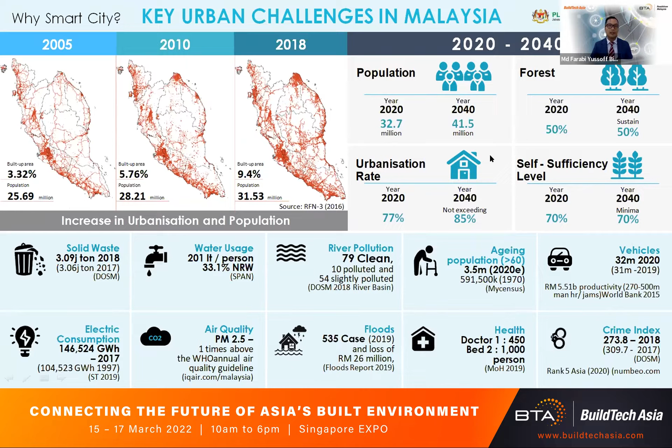Having said that, the Ministry of Housing and Local Government has launched a program called Livable Malaysia to make sure urban dwellers will be able to live in a better environment. Our minister is eager to lead this initiative, led by the Ministry of Housing and Local Government.

The ministry has taken proactive measures by introducing the Smart City Framework back in 2019. It is a national level framework that serves as a guide and reference to local authorities as city managers, state governments, federal ministries and departments, industry players, academicians, and other stakeholders in planning and developing smart cities in Malaysia holistically and in line with current development. We have this framework as what we call a textbook for smart city in Malaysia.

So what is smart city? Probably we have various backgrounds here, so I should share the definition of a smart city: a city that uses ICT and technological advancement to address urban issues, including improving quality of life, promoting economic growth, developing sustainability and a safe environment, and encouraging efficient urban management practices. This is basically the definition that has been accepted in Malaysia.

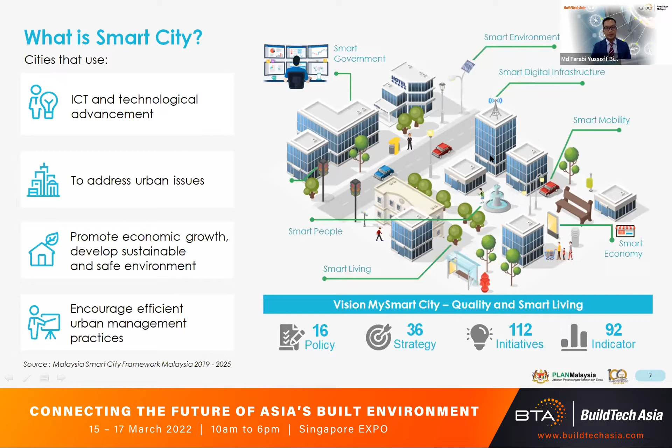Smart city is a very broad area and focus area. The comprehensive smart city development process encompasses 4 unified components: consumer, services, data, and digital infrastructure. Smart city is a unique approach in managing cities. What we see around us is horizontal development, however smart city works vertically as well. From the top level with the people-centric concept, the people will decide what kind of services and facilities are needed in the smart city.

This will then generate the second level tier, which is the kind of services that have been provided. We have a lot of services being offered here in terms of transportation, electricity, water supply, telecommunication, and a lot of other services as well.

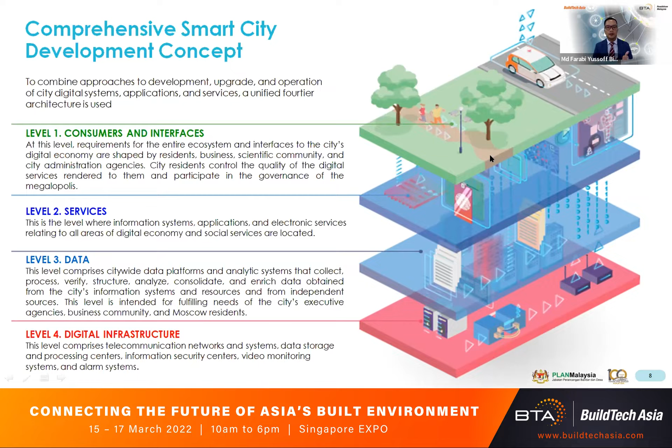The third level is the data being generated from the smart city initiative. For me as an urban planner, the key point of smart city is actually the data - data is wealth, and this data is something that we need to manage. The last level is digital infrastructure - smart city couldn't function at the optimum level without good digital infrastructure, which ensures the whole system works.

So big data. This is my favorite topic. Big data is often discussed in the context of international development and improving the urban environment. But what exactly is big data? How can it be used?

It is a fundamental component of the smart city. Big data plays an important role in a smart city. Cities can process data from IoT services, devices and sensors to recognize patterns and needs. Smart cities use IoT devices such as connected sensors, lights, and metering to collect and analyze data. The cities then use this data to improve infrastructure, public utilities and services, and many more.

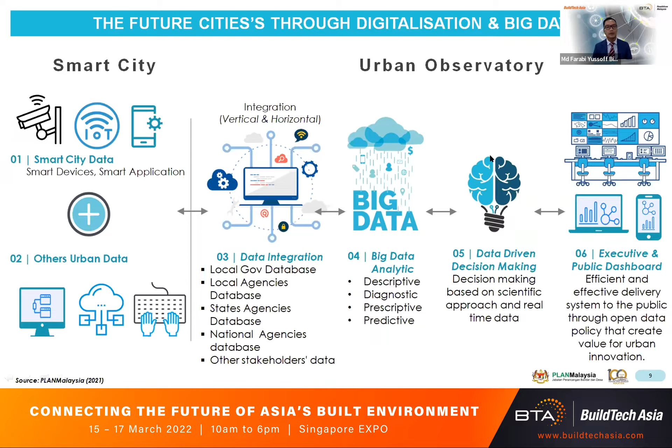Having said that, the biggest question mark is how we measure the smartness of a city. At the global level, ISO, International Standard Organization, have published more than 22,000 international standards and related documents that represent globally recognized guidelines and frameworks based on international collaboration. Built around consensus, this provides a solid base on which innovation can thrive and is an essential tool to help government, industry and consumers contribute to the achievement of every SDG.

As part of the implementation strategy under the Malaysian Smart City Framework, the Ministry of Housing and Local Government through Plan Malaysia have introduced the Malaysian Standard on Smart City Indicators to measure the smartness of the city and to establish a standard that recognizes a smart city status which is globally accepted and recognized.

Plan Malaysia, my agency, is working together with the national standard body, the Department of Standard Malaysia, and other stakeholders to develop the Malaysian standard on smart indicators, now known as MS ISO 37122:2019, via identical adoption of ISO 37122. We just launched this in December last year.

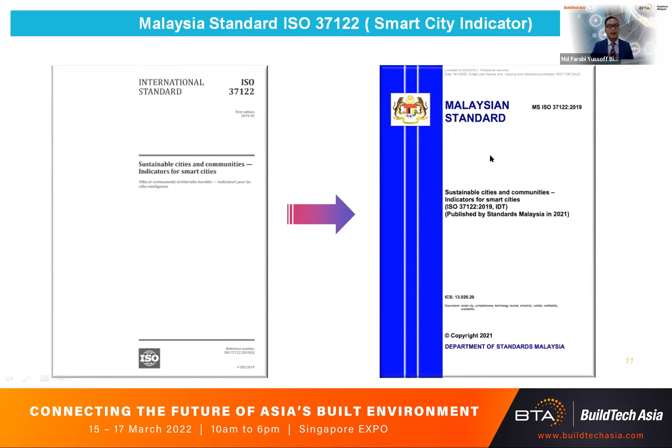These are the simplified indicators based on the city indicators in ISO 37122. There are 80 indicators to measure the smartness of the city globally and also in Malaysia, under 19 city indicator categories.

This is how we simplify things, in a more reasonable diagram. These indicators under this standard also highlight the future built environment. For example, buildings equipped with smart water meters and smart energy meters, road networks equipped with real-time online traffic alerts and information, and the provision of smart garbage bins equipped with sensors, and a few others. These are some of the smart initiatives that could be introduced in any developments in the future.

The future built environment should be equipped with smart building elements. This is one example I took from smart buildings under smart environment, that use technology to enable efficient and economical use of resources while creating a safe and comfortable environment for occupants. Smart buildings may use a wide range of existing technologies and are designed or retrofitted in a way that allows for integration of future technological development.

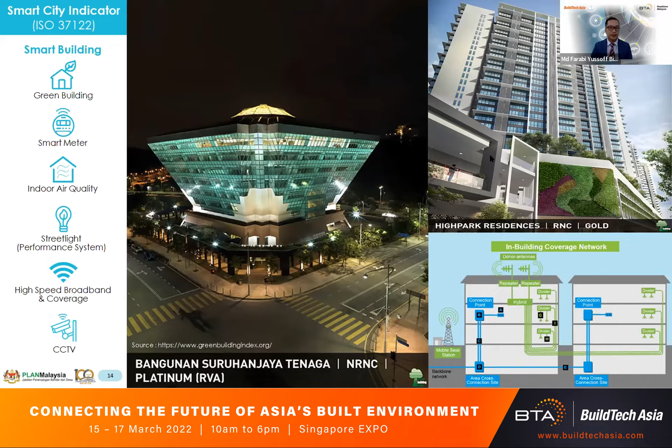So these are some examples. The basic idea behind green building is to carve out techniques and skills to bring down the effect on the environment and human health to a lesser degree, by promoting the optimal use of renewable energy.

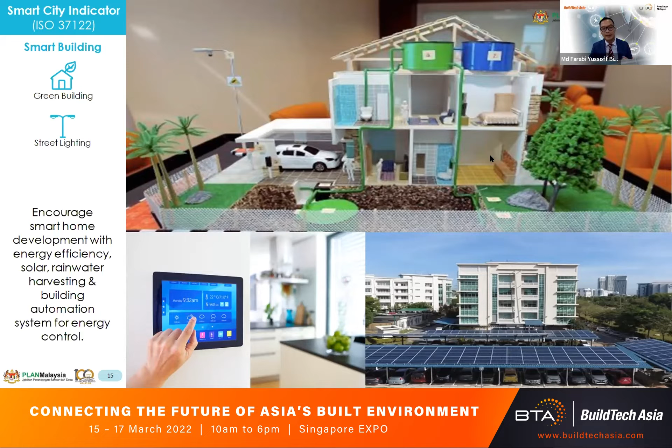Using sunlight through passive solar, active solar, and photovoltaic equipment, and using plants and trees through green roof, rain garden, open space, and reduction of rainwater wastage. This is very in line with our standard ISO 37122, which emphasizes two elements: smart green building, the need to have a green building and to refurbish old buildings which are unsustainable, and smart street lighting to refurbish old lighting to smarter ones.

Next, smart transportation. This is another issue a lot of cities are facing. Smart transportation and smart city traffic management are

revolutionizing how cities approach mobility and emergency response while reducing congestion on city streets with sensors, advanced communication technology, automation, and high-speed networks. So the smart city indicator standard highlights real-time online traffic alerts and information, public transport lines with publicly accessible real-time systems, public transport with unified payment systems, public parking space with e-payment systems, parking space with real-time availability systems, autonomous vehicles, electric vehicles, charging stations, and so on. This is a kind of technology that we can use to improve mobility in the city as well.

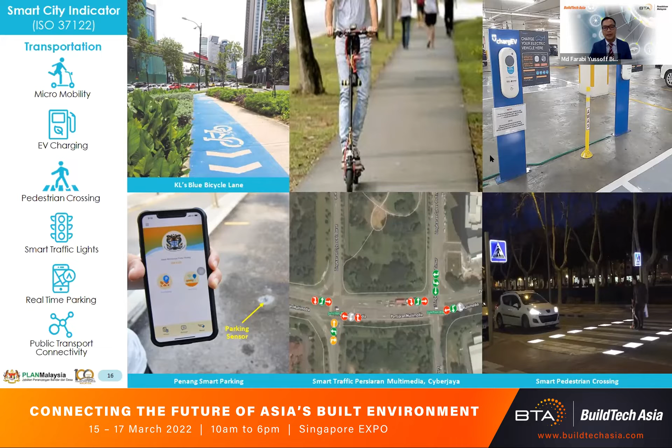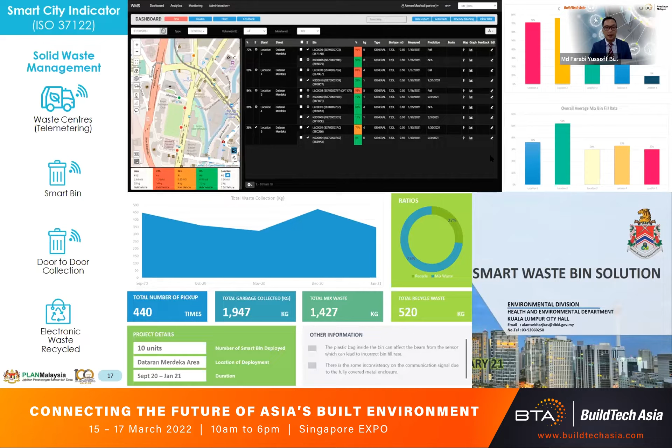Okay, I think this is probably the last one. With the adoption of ISO 37122, we see that it is just the beginning of the journey in a smart city. So we see that ISO 37122 can be used in three different perspectives.

Knowing that our crowd today comes more from construction services, I would like to encourage you to please use this standard from the strategic viewpoint, as a tool for smart city project planning at the local level, and set priorities based on the local context. In developing any new development, you can use the 80 indicators as guidance, and choose whatever is suitable to the local context and uniqueness of the city.

So for us at the governance level, we use this standard in terms of monitoring aspects. These indicators can be used to assess the maturity of smart city implementation throughout the cities in Malaysia. We have more than 200 cities in Malaysia, and about 155 local governments that govern the cities for now, and we can use this standard as well to measure the maturity index of a smart city and its implementation.

And the last one, we can use this standard as a recognition tool. So the standard will be used for evaluation and recognition to measure the smartness of the city.

As a conclusion, the development of smart city standards is very important to provide a guide for strategic planning to all related agencies in Malaysia, especially to deploy advanced technology-based solutions to help combat the worst case impact due to the COVID-19 pandemic or even climate change, by monitoring the health, safety, and living standards of citizens.

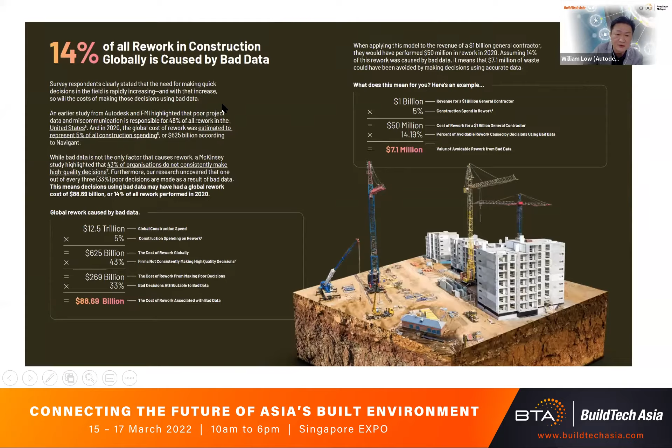Diving further into it, this bad data consists of two parts: missing data and duplicate data. In APAC, we contribute about 20% on average in terms of missing data and duplicate data. But what can we do to prevent this from happening?

We also found that 35% of time is really wasted on non-optimal activities. People spend too much time on paperwork, printing and writing on papers, and it's not able to replicate successfully. Even with BIM technology, there's still 280 billion dollars of rework, caused again by bad data.

We also found that 95% of the coordinated drawings already done in the office are not reaching site. That becomes a big issue, and that cost has resulted in 280 billion dollars of rework worldwide.

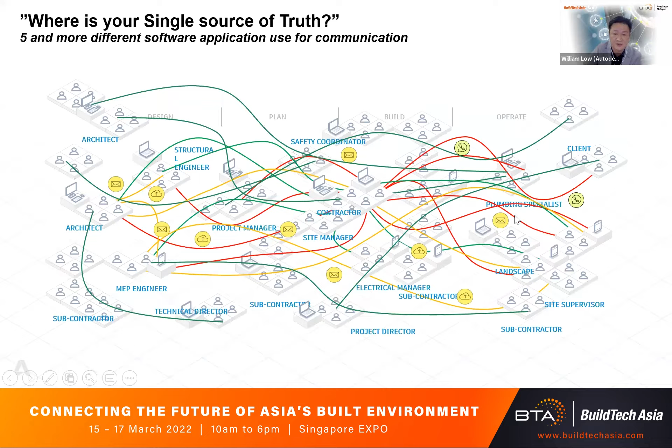And it's very obvious, right? You can see that everybody is using more than 5 software programs in one single project. Why? Because there's no single source of truth. If you drill further down into details, everyone takes their own part, using Dropbox, Gmail. These are good, but when it comes to an actual project, it's very difficult to trace back which version is the right version.

And it leads me to ask: where is the data? Who has it? How do office and field communicate more effectively, especially during this pandemic, when different people working from different offices come together for one new project? This is one of the issues we see: coordinated data is not reaching site, and people are relying on the wrong information to construct.

And you have to store all this paper that's going to be archived. Even after the project ends, all these things are causing a lot of social and environmental responsibility issues for the earth.

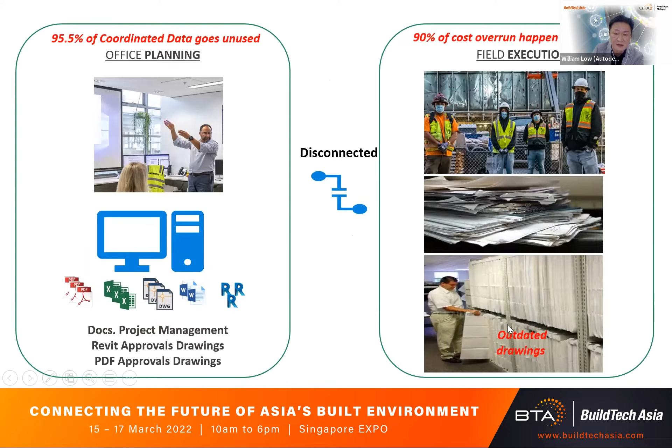I decided to use one particular case study. Recently we actually published this, feel free to take down the QR code, it will lead you to the construction blog.

It shows how we helped a particular main contractor, who had always faced issues, improve the way they work. At the end of the day, there was a huge return on investment: 30% savings in logistic management, and 40% improvement in the QA/QC process.

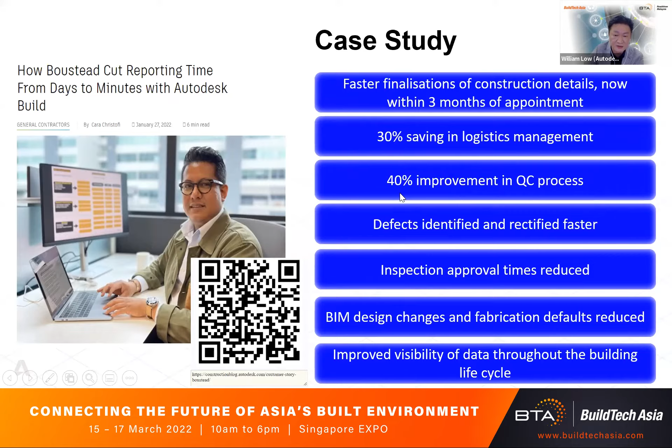Let me jump into the right slides for you. But before I go there, a quote given by this BIM manager, who is one of my very good friends: digital transformation is not about adding a set of digital tools or applications to work processes, but rather changing what we have been doing for the past 10 to 20 years.

It's true that there are better ways to work, and today I'm going to explore with you what are the better ways. Before we get there, let's look at the challenges as usual.

Approved data is not reaching site. Information gets lost through manual tracking, which is very tedious. There's no single source of truth, which is the reason why we're encouraging ISO 19650. And we're talking about capturing paperwork on site, which isn't replicable across all projects.

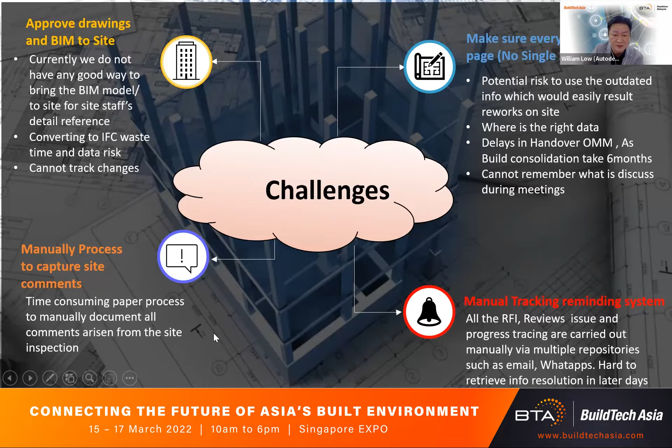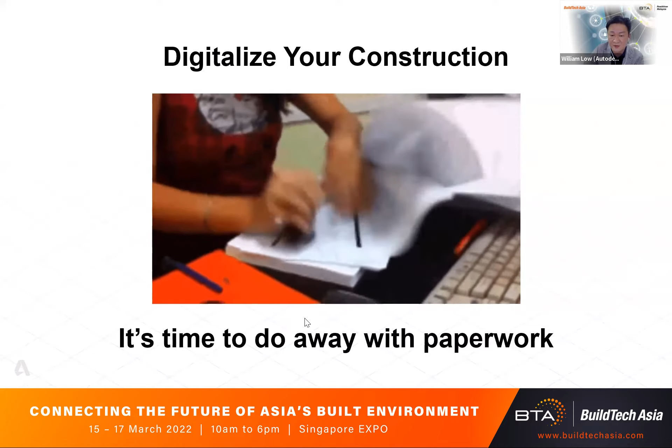I think it's time to do away with all the paperwork. At the end of the day, all this printing is costing a lot unnecessarily, increasing the carbon footprint. What we want is to bring people into one common data environment from all kinds of native format files that you need to work on approvals, bringing them from design stage all the way to pre-construction, to field construction, and at the end of the day, handover. Big data is also very important for building maintenance, when talking about as-built information.

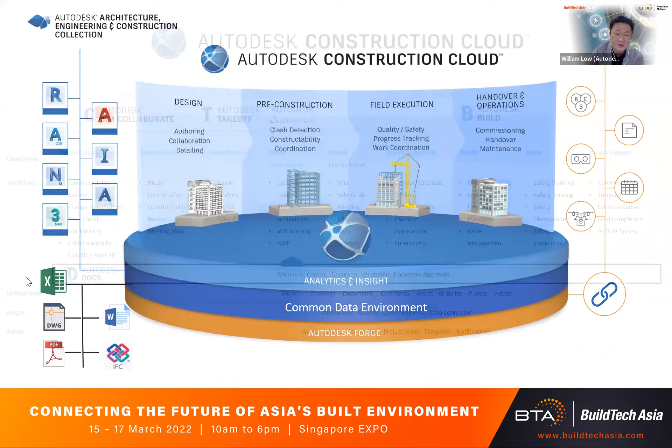With that, we actually started to introduce the Autodesk Construction Cloud, which we invested heavily in, to bring people to work more effectively in one common data platform. Today we will focus a lot on this area, which is what Buildtech has used.

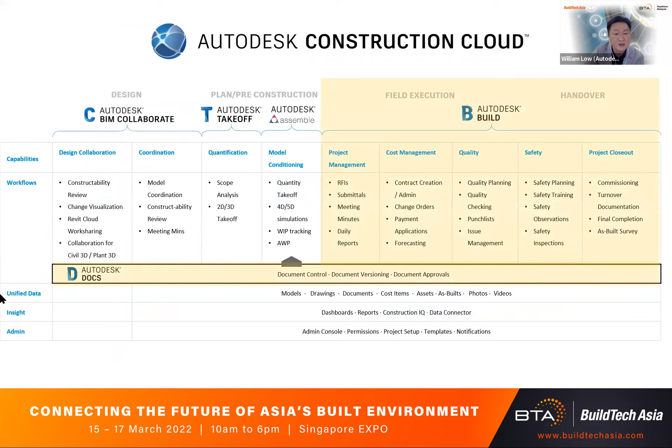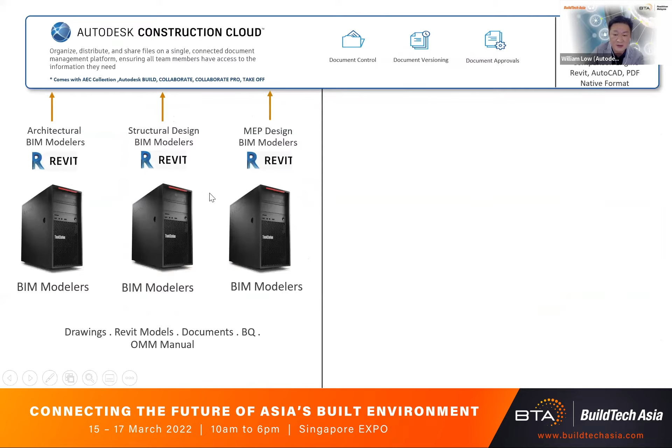What we did was have all the BIM modelers or BIM teams start to upload their drawings and BIM models into the construction cloud. Eventually, all other stakeholders who are not BIM-focused, important people, can easily finalize and do walkthroughs in the cloud.

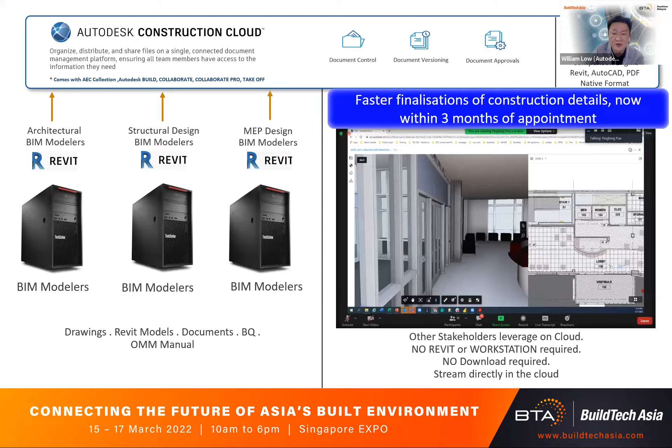Without the need of powerful workstations, streaming directly from the cloud using the power of cloud computing, we're able to collaborate more effectively through Zoom meetings like this. And with all this analytics on an important platform, we also understand who is using wrong data or older version data while working on site. All this gives quick insights into what's needed to be more effective.

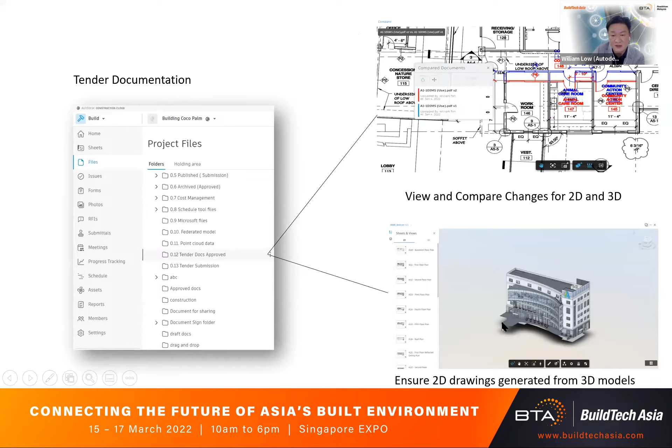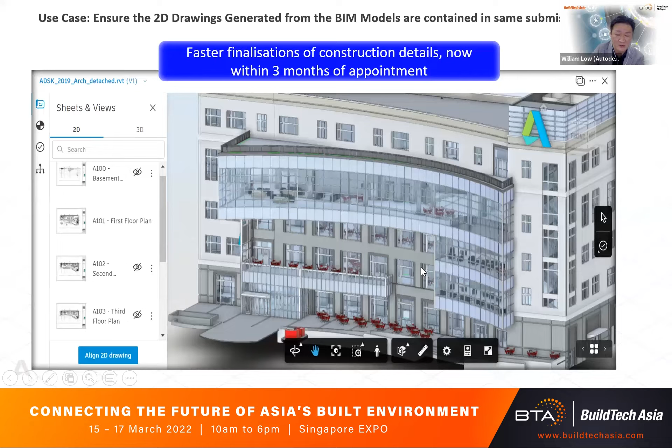Talking about ISO 19650, it's also important to make sure that information already published easily allows you to manage changes and understand what changed between the 2D drawings, on top of the 3D drawings that are submitted. When 3D models are submitted, the 3D model comes with the 2D drawings generated, which prevents people from using the wrong or outdated PDF drawings.

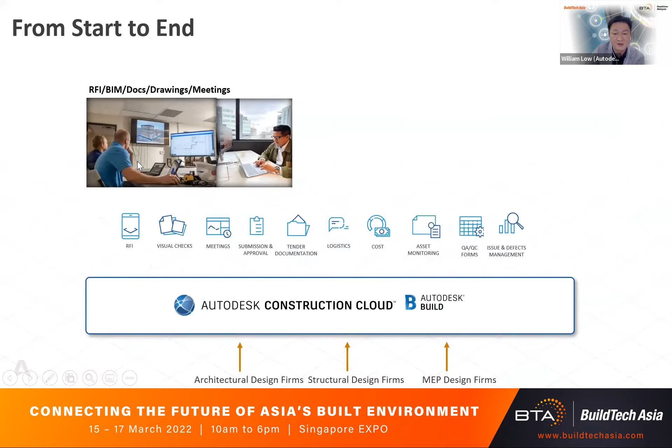When people work alone, and eventually when submissions are there, they have to do RFIs, meeting minutes, approvals, all in one platform. When we start working with different companies and different offices, we're able to push information faster and quicker to the field. All these things come back to analytics and big data for you.

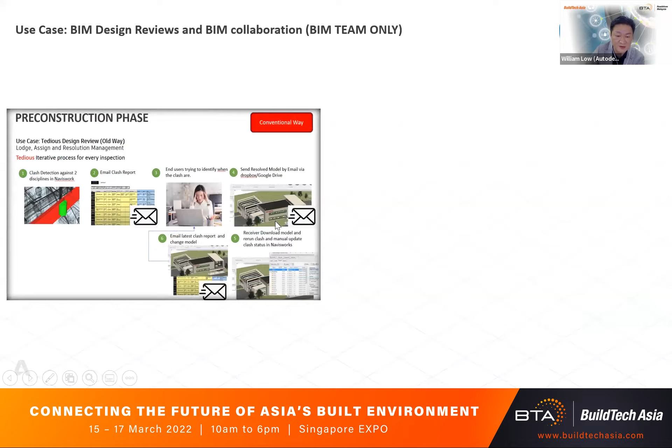Look at the conventional way of working - it's very tedious. You do a design clash check, run the emails through a clash report, hoping the user understands where the particular clash happens in the BIM model, eventually send it back to the respective stakeholders, and they have trouble understanding. This design iteration just continues.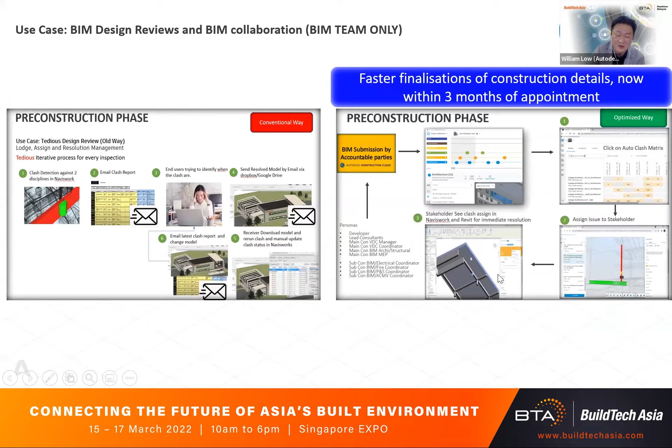Why not work a better way? When submission is done, there's a model checker telling you where the issues are, pinpointing them, and at the end of the day you click on the issue, assign it to the respective people, and they'll be able to see in their own offices what you're trying to communicate. That results in eliminating abortive work quicker and coordinating the BIM model more effectively.

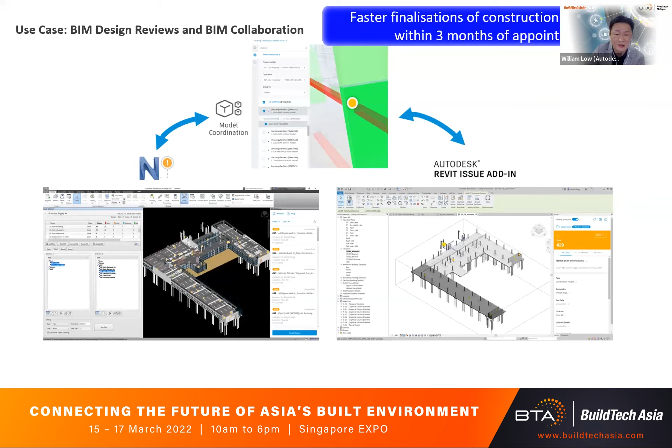Once all this is done, people ask me, what about 2D drawings? We are used to 2D drawings. Yes, we support 2D drawings.

When design issues are spotted, the conventional way is people printing it out, marking it up and drawing on it, then eventually scanning it back. Then they have to email it to the person, who has to interpret the handwriting, email back to the end users, and eventually all of this has to be archived.

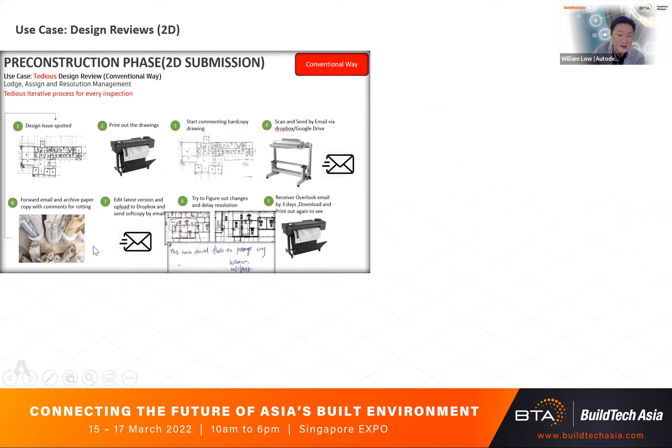Why not do it in a simpler manner where we bring data digitally and walk away from paper? In fact, Buildtech has now gone fully digital without printing a single piece of paper. Everything is documented, issues are pinned and eventually resolved, and we can compare drawings directly between two different versions.

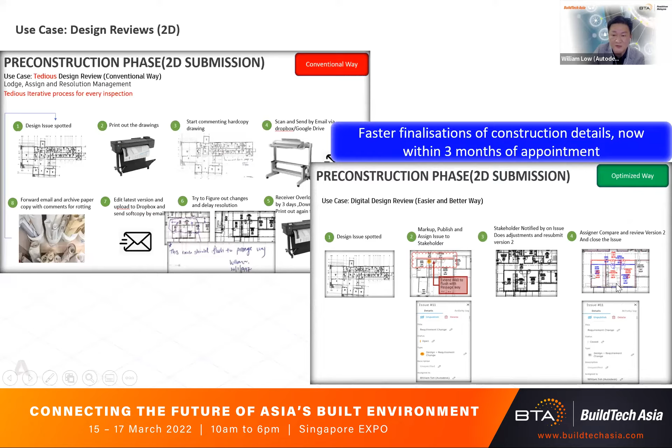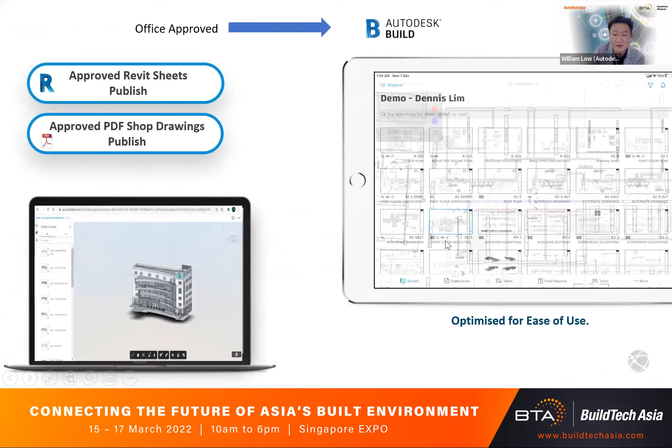When drawings are coordinated and approved, we're also able to very easily publish information directly to the field, making sure the document is available for their construction.

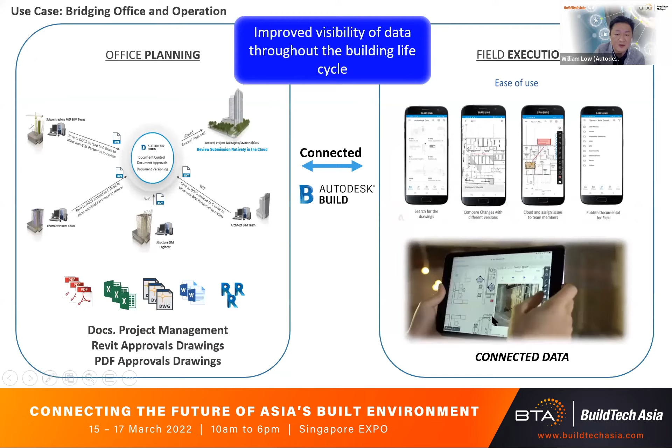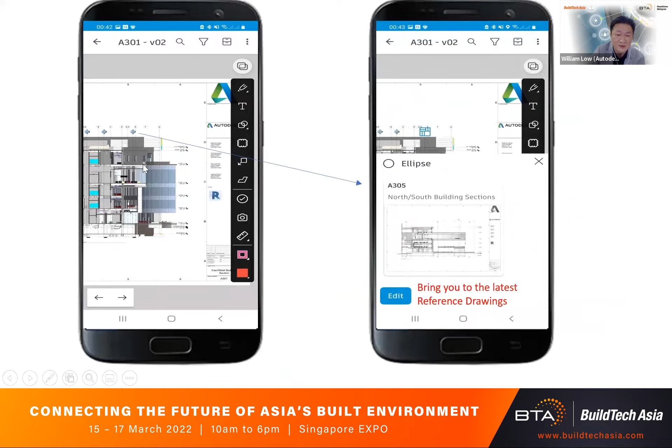When we talk about connected construction, we're talking about connecting the CDE to the field and making difficult things simple, so that progress photos can be captured and everybody has clear visibility of what's going on. This includes referencing the correct reference drawings, using technology to automate the referencing, bringing you the right drawings at any time, anywhere.

And all this RFI, when there's a change management, how are we able to mark out and tag to RFI? Whenever there's a variation change that causes a cost impact, we are able to tag this RFI to the particular cost management module.

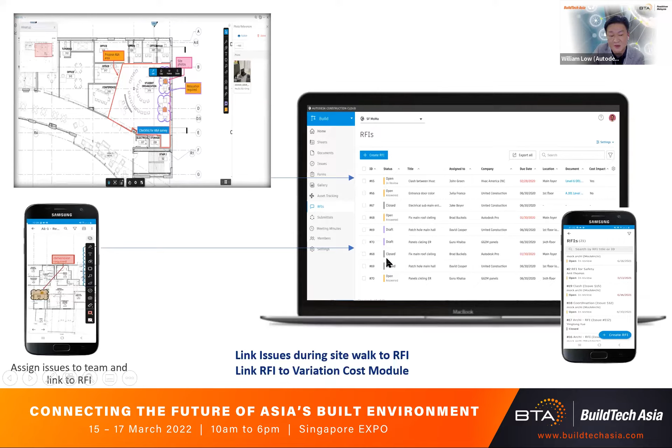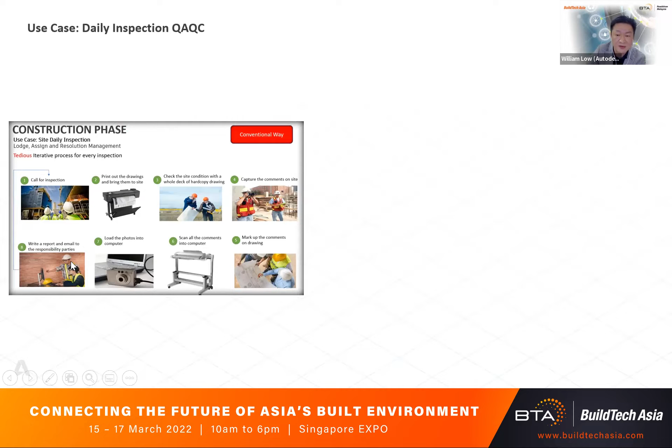During construction phase, we also see a lot of non-optimal activities. Eight steps needed on a daily basis to go for site inspection, print out the right drawings, mark out on the drawings, scan back, put a photo, email. Why not do it in three simple steps that cut away the unnecessary time spent on paperwork?

And with the data coming back automatically, we're using Construction IQ. There's AI in it to understand which are the high risk factors and which subcontractors we can add value to, to make sure they're able to resolve issues in a quicker manner.

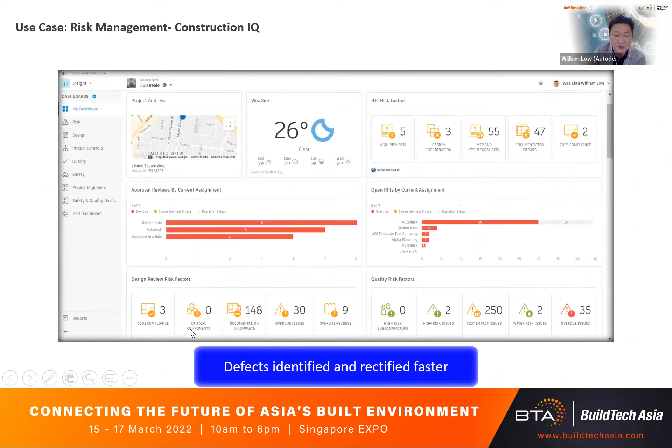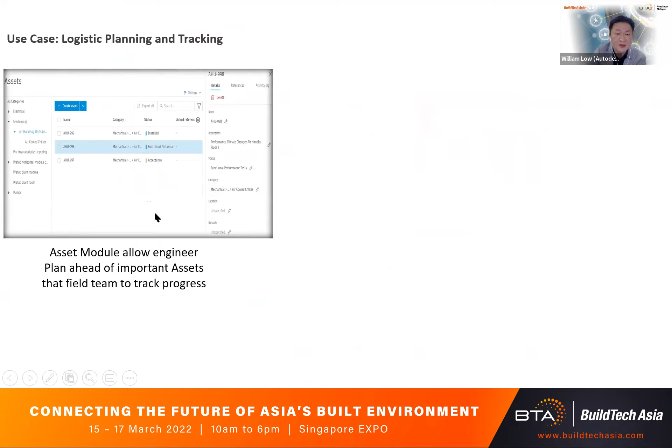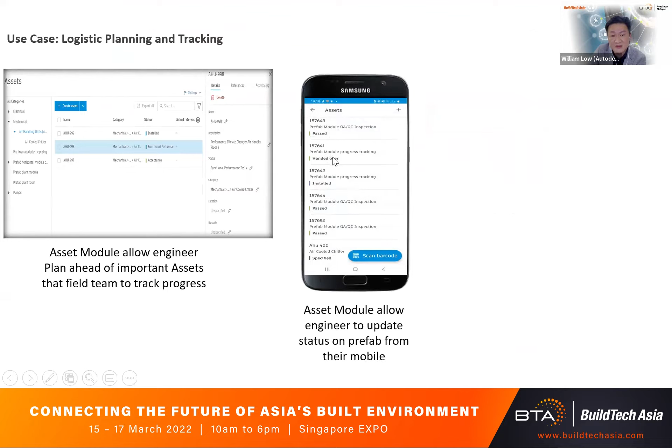We just want to skip ahead because we're mindful of time. Logistic planning is important, so we are able to plan the important logistics to understand when they're supposed to reach site. Once an engineer is doing their work on site, they walk away from non-optimal activities like updating Excel spreadsheets. Now they just need to flag the status week on week, what has been completed on site, and we give you a Power BI dashboard to fully understand the progress of work done.

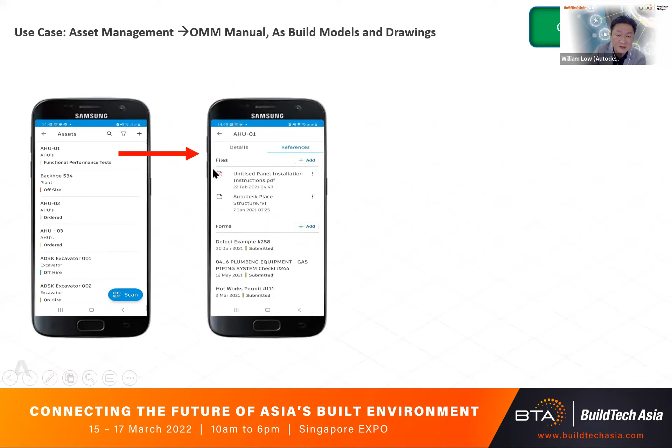We also went further into advancement in terms of tying in the as-built data that is very important for developers and owners to make use of information that's already constructed. At the end of the day, all these O&M manuals and catalogs can be tied in. We know what as-built models are handed over, and we also know what commissioning checklists have been done and digitalized on the field.

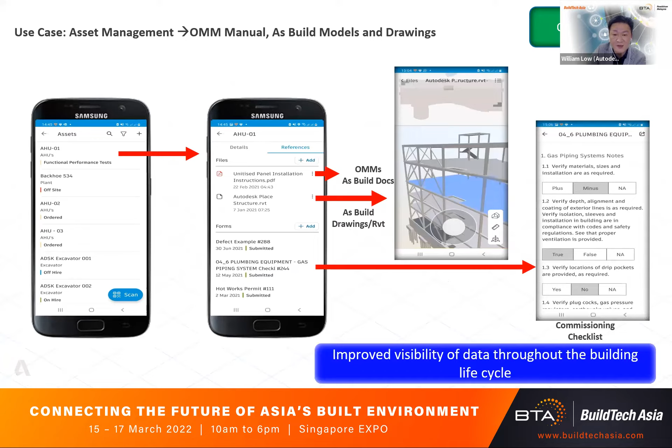Only with a common data environment that's connected between the office and the field are we able to improve productivity. We learn from the past, not to stay the same. Today, Autodesk is investing heavily, not only in design tools, but also in the cloud space on digital twin, data analytics, whatever helps owners have a better and sustainable project.

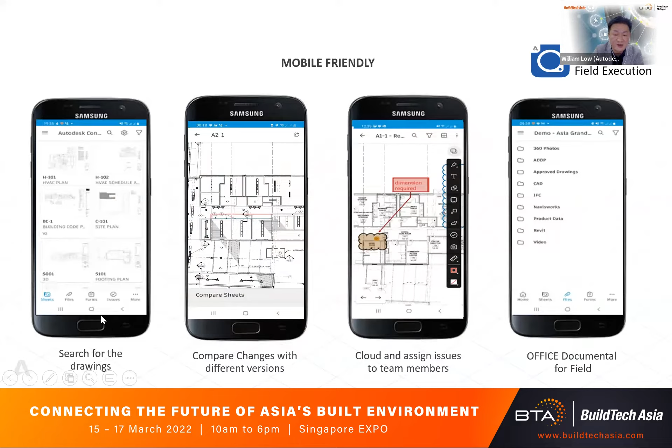So the keyword is ease of use. If we have technology that is not easy to use and not able to be digested by the ground, nobody uses it. So in our recent investment, we actually unified the platform into Autodesk Construction Cloud from the recent acquisition. I believe together we can make it a better generation for the years to come.